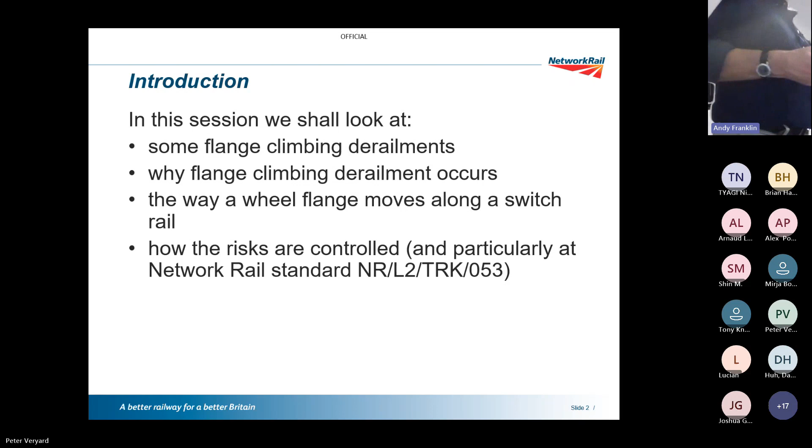Things to keep in mind: when we're doing the checks with the gauge, that's quite a lightweight gauge, but what we're really dealing with is a wheel set, which weighs around a ton. So there's a fair bit of inertia there. Wheel sets really run around on their own, but they're normally in a bogie these days, so you're now going up to what, 5 tons or maybe 7 tons for a passenger coach. And obviously for traction motors as well, you've got more of that. So there are considerable inertial and non-track forces in action, for example bogie rotational stiffness and yaw stiffness and those sort of things. So when you're using the gauge and doing checks on switches, think of that's what you're really dealing with - big, heavy chunks of metal with a lot of inertia and a lot of force.

Okay, so the TGP8 gauge we use is basically a thin slice of a wheel - it's the wheel profile of a new P8 wheel profile. And I think by its nature, it's not a simple no-go gauge, so you do need to understand what it's telling you and think about it.

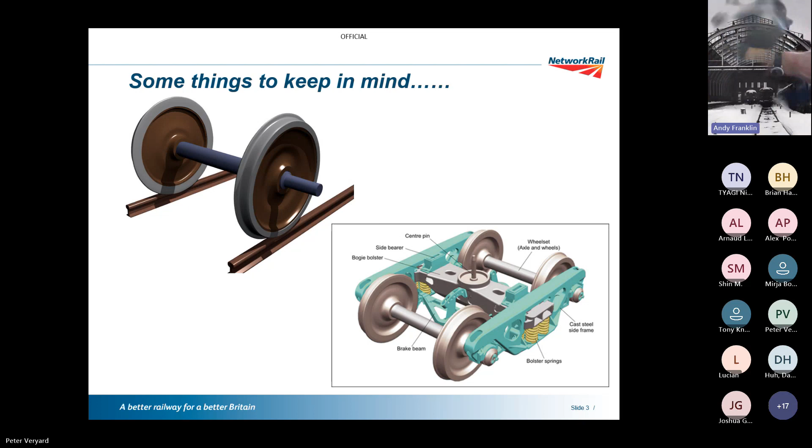This was born out of when we had a couple of incidents in a row. We had 2 incidents at Waterloo, and some of you may remember it, some of you may not - 2006. We had two derailments in pretty short order, 11th of September, and then another one on the 24th of October on the southern region at Waterloo Station.

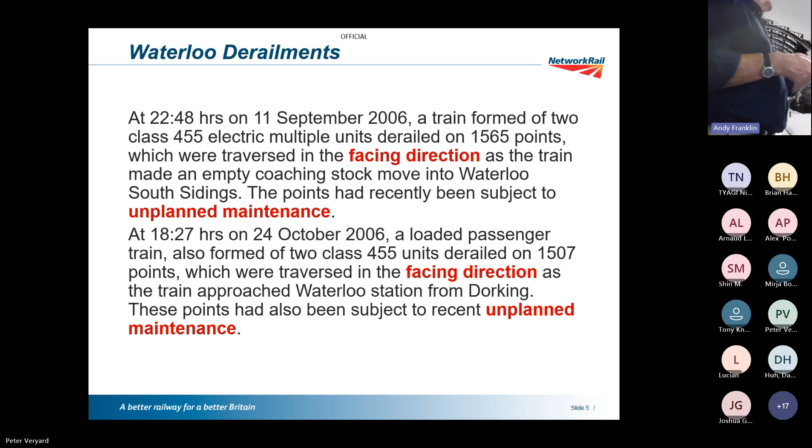And the key things that came out of the RAIB inquiry is they're both facing point directions, and I'll explain in a little while why facing points are different to using the points in a trailing direction, and indeed why flange climbing derailment on S&C is a significant risk where it's a much lower risk on plain line.

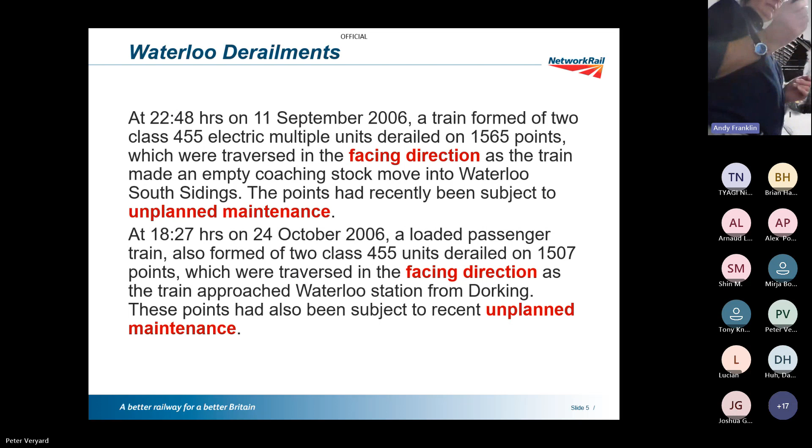The other things they talked about were what they described as unplanned maintenance - this was people reacting on the night to what they found. The work hadn't been properly scoped up. It was a case of, well, we find this and we'll fix it, or we'll try and fix it. And in both cases at Waterloo, they failed to fix the problem properly - they fixed the immediate fault but left the switches in an unsafe condition. So in both cases, it was the next train over it that came off.

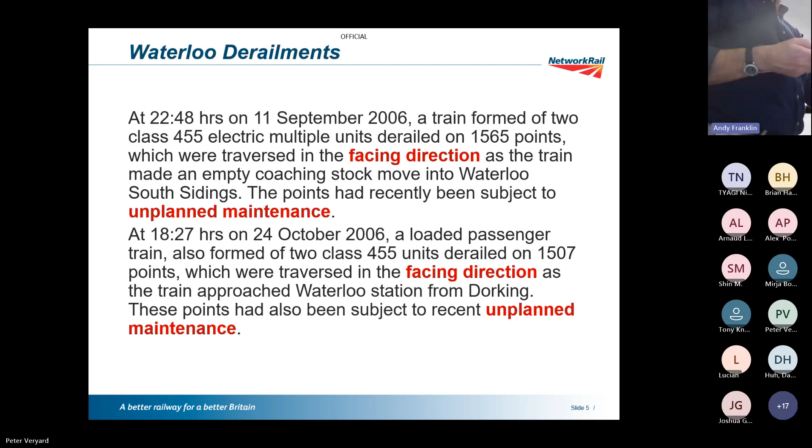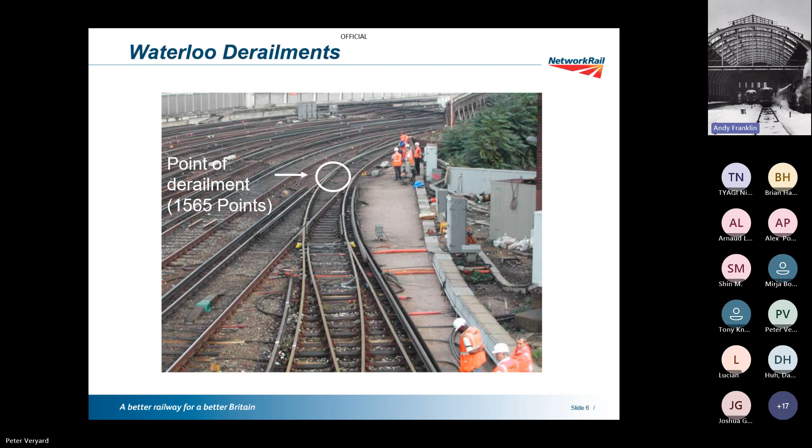And these are the 2 sites - fairly typical high-risk sites. This is coming in, the train was coming round into the siding, so obviously you've got quite a sharp curve in there because it's a similar flexure where it's almost straight the turnout, but you're going to get hard flange contact on the approach to it. This is the other one - the derailment happened back here, on the train that was passing round into there, that's the back end of the train. And as you can see, there's quite considerable wear on this switch.

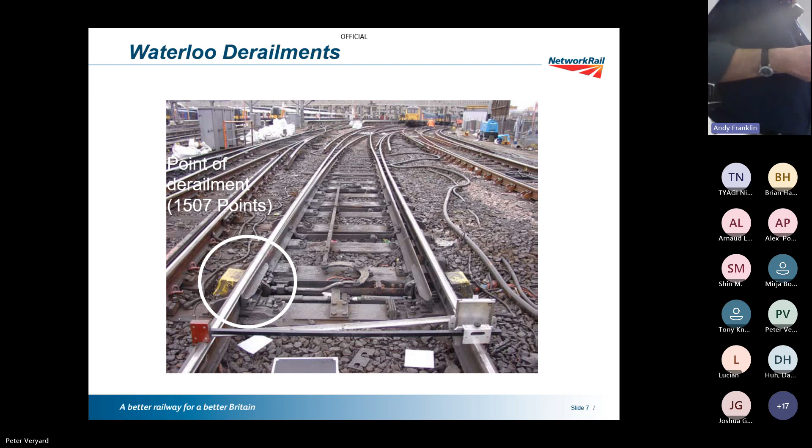So by their definition, you need high forces, and high forces usually mean sharp curvature. So facing switch derailments from this cause on a high speed track are extremely unlikely because the forces just aren't there. Having said that, they are generally low speed derailments, but I think you'll agree, I mean this is Waterloo, that the consequences could be quite significant. And if you think about the risk of a train coming into contact with line side furniture or with another train, that would be another big risk. Also doing that in front of Waterloo Station is a bit public as well, so it does our reputation absolutely no good at all.

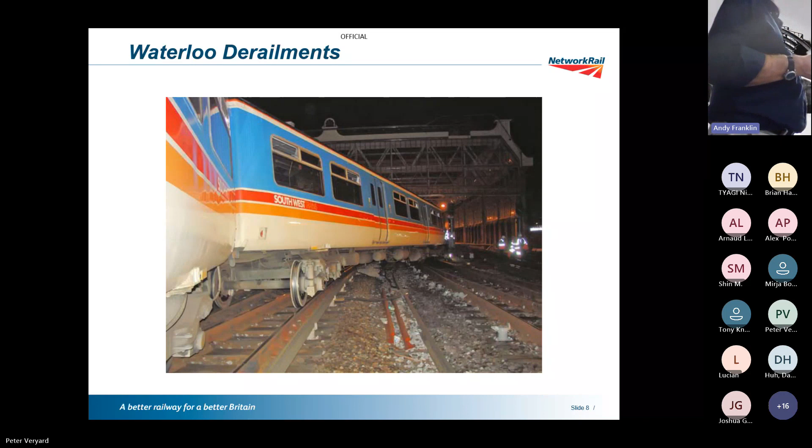So that's really the background of why we started changing the standard and how I got involved in looking in a bit more detail at why we get flange climb derailments. Okay.

So we're focusing here on flange climb derailment. Clearly, there are other reasons in S&C switches, so things like broken switches, point machines moving under trains, that we're not really looking at. We're looking at the risk of flange climbing derailment.

So in 1908, a guy called Nadal, I don't think he was a tennis player, but he may have been, came up with this simple equation for the critical value of Y over Q based on this simple analogy of a block sliding up a plane.

So Y is the lateral force, that's the force from the wheel flange outwards. Q is the wheel load, which is predominantly the weight of the train, but it's affected by loading and suspension as well. Beta is the flange contact angle, the angle from a horizontal plane to the face of the switch. And mu is the coefficient of friction between the contact point on that slope and the wheel, which is affected by the normal force.

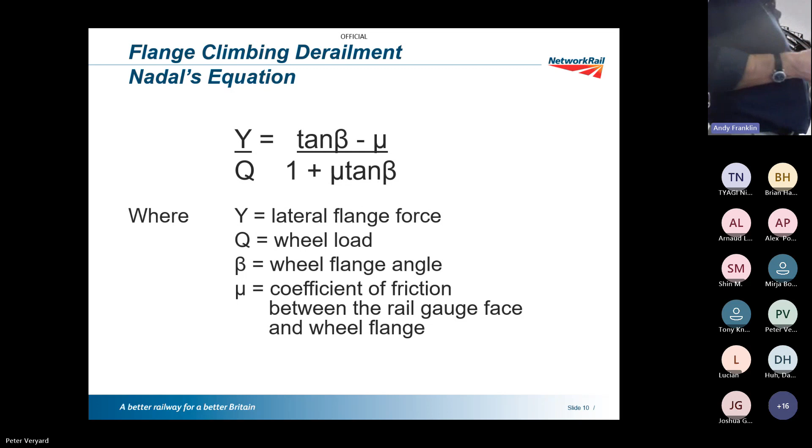Okay, so that's the relationship that applies. And what's really important is that at the point where flange climbing derailment is likely to occur, what we call Y over Q critical, equals about 1. So the objective is to keep Y over Q less than 1, because when you get close to 1, your factor of safety is disappearing and you have a real risk of flange climbing derailment.

So what we do, typically we accept it as 1. Clearly, in reality, we want a factor of safety. In essence, we usually work to a smaller value, 0.8.

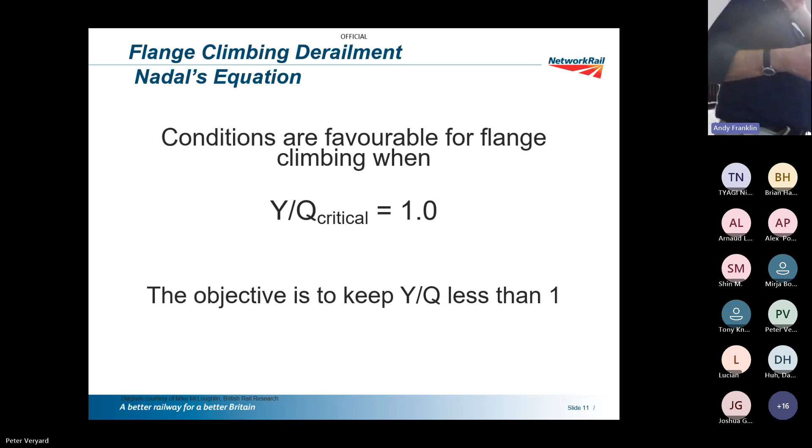So I think that's fairly straightforward. So what's going to happen when we start changing these things? So this is the wheel contact area. We've got Q bearing down, the weight of the train. We've got Y, which is the lateral force. This is the switch, so we'll have a normal force in there.

And this angle is beta, which is the plane of the two stock rails. So you can see by when we look at this, if we increase beta, we reduce the risk of derailment. The steeper the slope, the less chance of the wheel climbing it. And I think that's fairly intuitive, isn't it?

Also, if we reduce mu, i.e. we make the slope more slippery, then again, it's going to help avoid a train climbing. We'll look at the mechanism actually in a minute.

So again, from a maintenance engineer's point of view, those are the things we can manage, aren't they? We can manage the lubrication on the switches, and we can manage the flange contact angle by inspecting it and applying rectification. Clearly, we can't have a particularly big influence on Y over Q.

That's more the train side, but we'll see how changing that can also cause problems for track. So the opposite side of that, if we go on, is anything which increases the risk of derailment, so by reducing Q, anything which causes wheel unloading will increase the risk of flange climb, because we change the product.

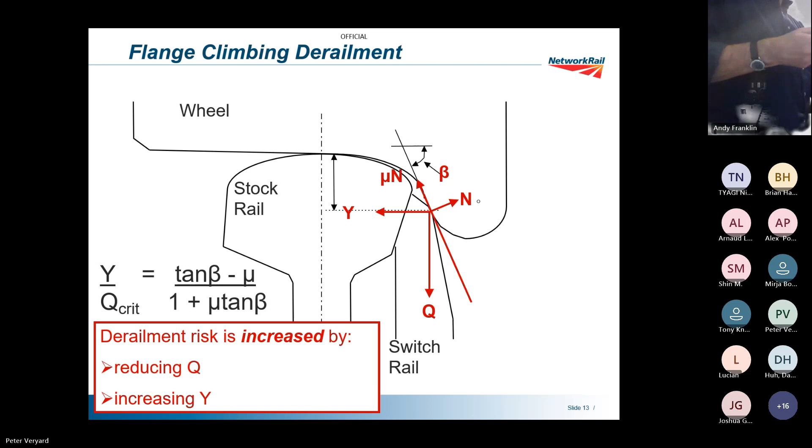So where do these figures come from? Well, they came from some UIC research. The UIC published a code 716R called Maximum Permissible Wear Profiles for Switches, and that's what British Rail Research used when the first edition of 053R switch wear management standard came out. And that was based on a lot of observations and some experiments.

And they basically said that to have a reasonable ratio of lateral to vertical force, it should be in the order of 0.8 for S&C. That gives you a reasonable factor of safety. And if you put that back into the equation and work it through, that's equivalent to a flange contact angle of 60 degrees for a coefficient of friction of 0.4, and a flange contact of 55 degrees for a coefficient of 0.3. And those of you familiar with 053 will be familiar with this 60.

It's the intervention point, that's the angle we start to plan to do some work. We must do it before it gets to 55, or that's getting into block-the-line territory. And when we grind it back, for a while we just ground it back to 60, but clearly if you grind it back to 60, the next time you come along, you're going to fail it again. So we try to grind to a slightly steeper angle of 65 degrees, which is actually still flatter than the original machining of the switches. Okay, does that all make sense?

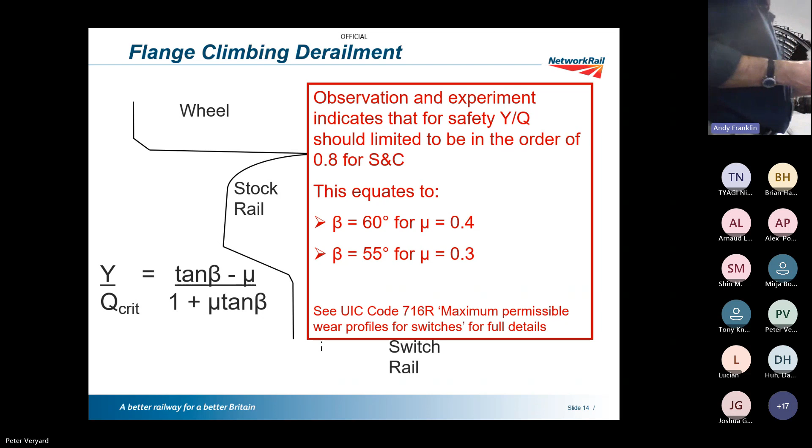So think about some other things which affect it. In an ideal situation, with a single wheel set running down a piece of perfectly geometric track, the rolling radius difference, because the wheels have a taper on, will mean that the wheels will steer themselves down the middle and there will be no flange contact.

In practice, that doesn't happen because we don't have perfect track. And also in curves, you want the wheel to shift, don't you? So the wheel steers itself by shifting outwards so that the outer wheel is now running on a very slightly bigger radius than the inner wheel. It's quite subtle, we're only talking millimetres here. But that tendency of the wheel to shift to correct the rolling radius difference means you tend to get a bit of gentle movement in the flange.

So clearly in a pure situation where the wheels are rolling as a single wheel set, that's the situation. If you now constrain the wheels, so the wheel sets want to sit radially to the curve, but we've now constrained them in a bogie frame or a vehicle frame, they can no longer do that. They are constrained to stay. There's a bit of flexibility there, but not a lot.

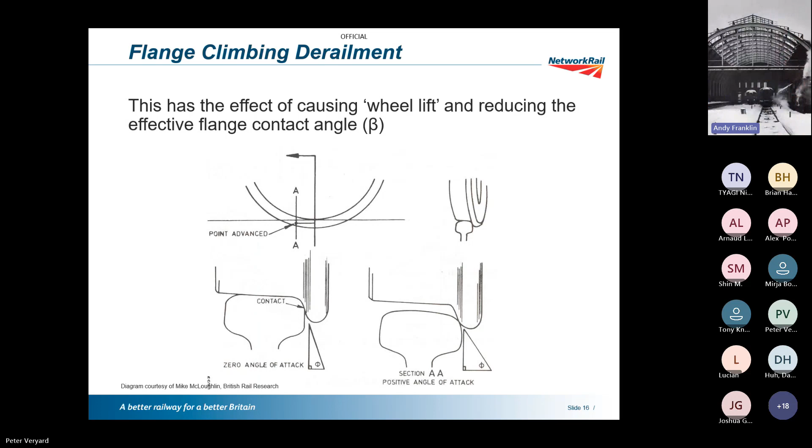We don't really compensate for that in what we do with switches. We have safety margins built into it. But if you were modelling a real switch and a real situation, a real wheel, then you can actually start taking account of things like this using VAMPIRE modelling and things like that. So that's quite important because that does affect the risk of flange climb. Does that make sense?

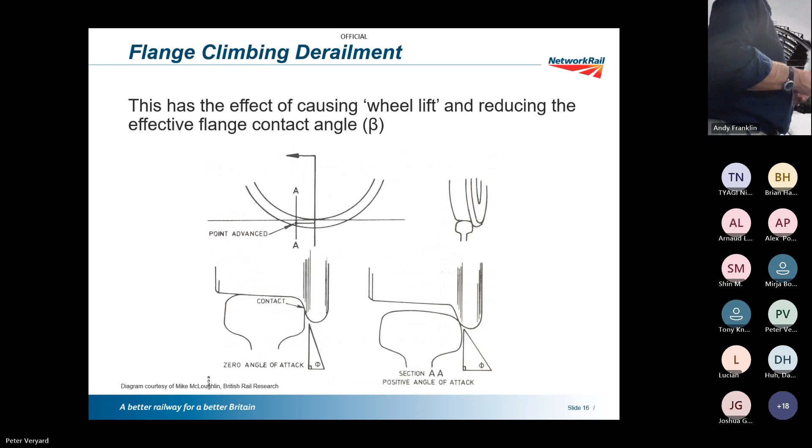So this is a case of a flange climbing derailment which didn't quite happen. Obviously the switch must have been shut at the time, but you can see here where the wheel has climbed onto the head of the rail and it's run along effectively with the switch closed. It's run along the edge of the switch and then dropped back in again. If you ever see anything like that, block the line. But it does happen, and we do get things like that. You do occasionally see the marks on the face of the switch - scuff marks here, where the wheel has climbed up and then dropped back in again.

Because as you think about it, as the wheel starts to climb up onto the flange, the rolling radius difference is now huge, isn't it? So it's going to tend to steer itself back into the track again. But it is worth remembering, this was an incident at Victoria Station some years ago, and it was spotted by one of the S&T techs who was working on the track in the days when we used to work on the track with trains.

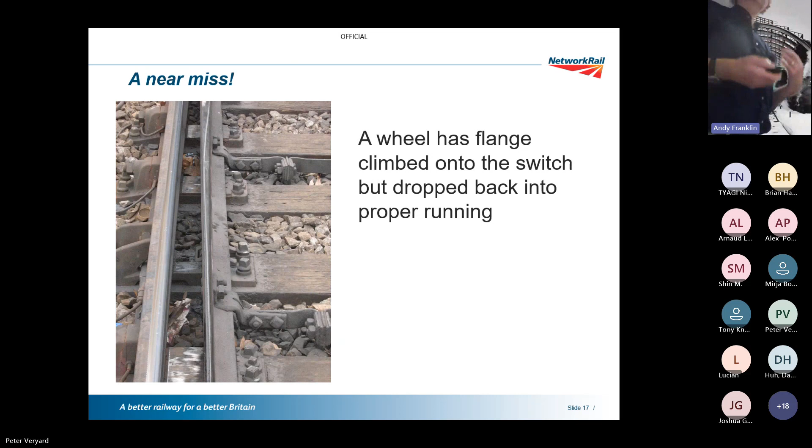So that's the theory part of it. Now we'll move on to the forces in action, and explain that. So what are the forces in action?

So this is a typical modern turnout, seen during relaying, and it's Chipping Sodbury. If anyone's into it, it's probably been underwater recently as well. So it's a modern design turnout.

In normal running, the wheel sets tend to steer themselves to be central using the rolling radius difference. So if you're running straight through, as this is set at the moment, you're probably not going to get any flange contact at all. You might get a slight flange contact, but very little.

But if you've now reversed the point going into here, at some point this wheel set running along here is going to come into contact with the switch and be steered onto a new course. In maintenance terms, I can think of lots of places where this switch doesn't last that long, but this switch is the one that was put in when they laid the turnout, because this switch is going to get all the wear, isn't it? Yeah, and that's within a simple straight turnout.

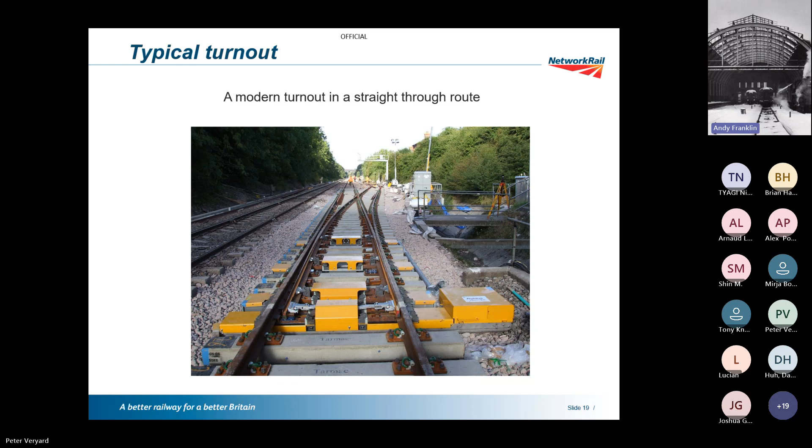Clearly, if you curve up the main line radius, then you start to change things again. But the way we do it in the UK is we keep the lead length the same, we keep the crossing angle the same, we keep the offsets the same. So something's got to change, and what changes is the radius. So these two turnouts are identical.

This one's a similar flexure, and you can see the effect of the curvature here is to tighten up the radius inside the turnout. So similar flexure switches are always much more at risk of facing switch issues, wear and derailment risk.

With contraflexure, the opposite is true. In this case, if you imagine it was straight, it would be curving around there much more. It's had the opposite effect, hasn't it? The mainline curvature has actually flattened the turnout radius.

So generally, contraflex switches don't have this problem to the same extent. They do have problems like this one because of the cant on the main line and those kinds of things, but we'll put them to one side. They're not the risk that similar flexure switches are. So we spend a lot of effort these days trying to design track layouts without putting more similar flexure turnouts in them.

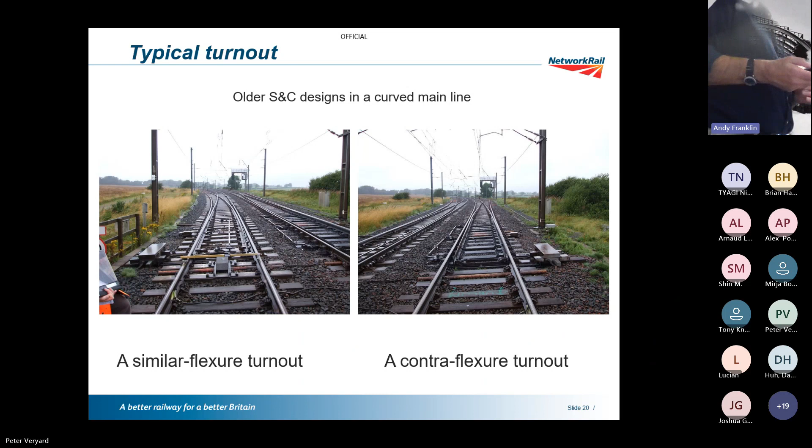Okay, so let's have a look at the forces. Does anybody recognise that diagram? Mr. Steele will, anybody else? That's the base geometry of a vertical turnout.

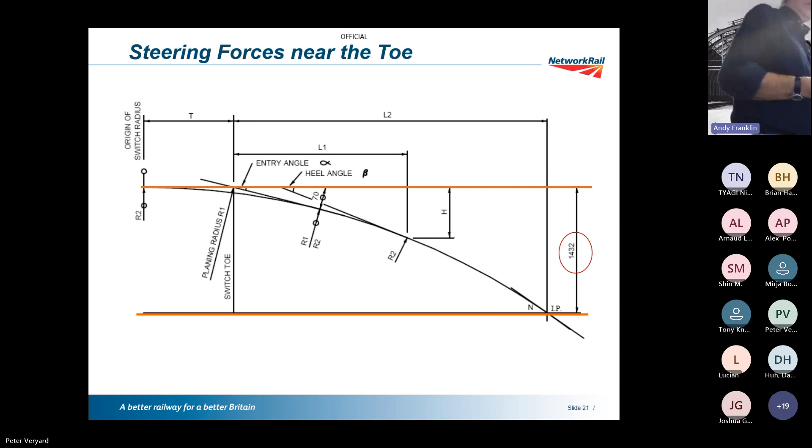So it's a natural angle turnout. Obviously that's your gauge, 1432 in this case. And the design, the turnout curve actually, in theory, makes a true tangent with the high rail, the stock rail.

Now it would be lovely to make a switch like that, but what do you think would be the practical limitations if we did that? A razor sharp switch - you'd have a razor sharp switch, and it would be very thin and very delicate.

So it'd be nice to do that, but what we practically do is from the point where the head - this is 70, so that's the rail head width - the point we go there, we add a planing radius, which is a flatter radius. But what it means is that where the switch at the wheel switch toe meets the stock rail, you now have a finite angle. You've an alignment fault effectively, don't you? Yeah, the entry angle to the switch.

And the shorter the switches - so A switches are our shortest switches - has the biggest entry angle. H switches, G switches have a much, much smaller entry angle. And that's another driver of why we get more problems with short switches than we do with long ones.

And obviously, if you're talking about CV 9 1/4 and DV 10 3/4, it's quite low speed as well, but quite tight curvature. So what happens to our wheel set as it's turning along?

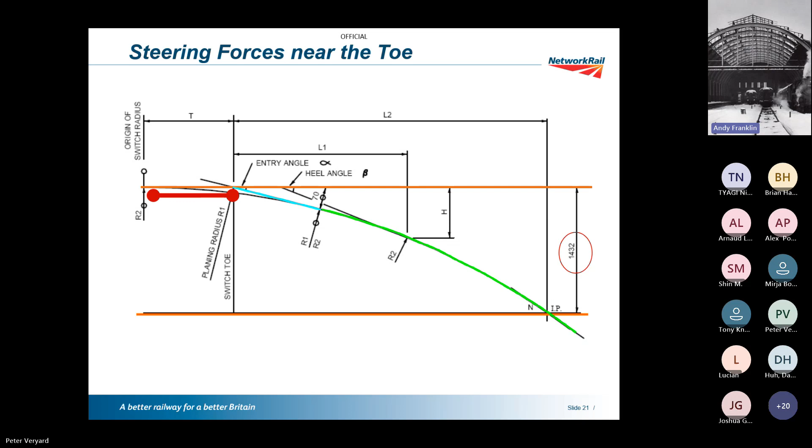But if the main line's curved, and particularly if it's sharply curved - think of the pictures of Waterloo - it's quite likely that you will be running in flange contact already before you get to the switch.

So again, we come into the turnout. Let's run through that - what happens here? So there's our first case. In this case, there'll already be some lateral force because we're in flange contact as we're approaching the switch. We then have a much bigger peak because it's steering further round. And because this is tightened up, we settle down to a higher curving force in the turnout.

It is this which drives facing switch derailment, because typically it happens in the first metre and a half of the switch - you've got this big lateral spike, and as we saw, anything which increases the lateral force increases the risk of derailment, other things being equal. Okay, does that make sense?

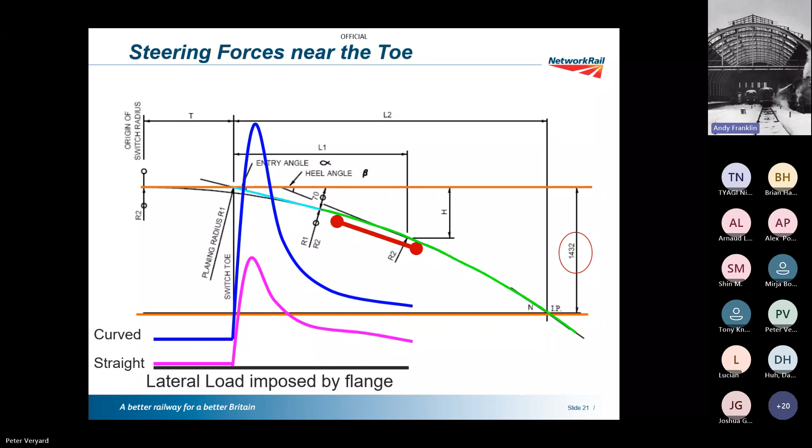Any questions online? No?

Why don't we, on similar flex switches, just put 5 or 10 millimetre cant on the switch? You could, and it has been done in the past. Horrible to maintain - it's a real challenge to maintain, but I think the answer is really to try and avoid using them.

We tend to use short switches for the wrong reasons, don't we? There are places where it's geographically constrained - at the end of Shrewsbury Station, you haven't got much room before the two routes diverge, so you're going to end up forcing a lot of S&C in there. You will end up with A switches in running lines in places like that. Where we don't have to, we should put in really the longest leads which are economically sensible, shouldn't we?

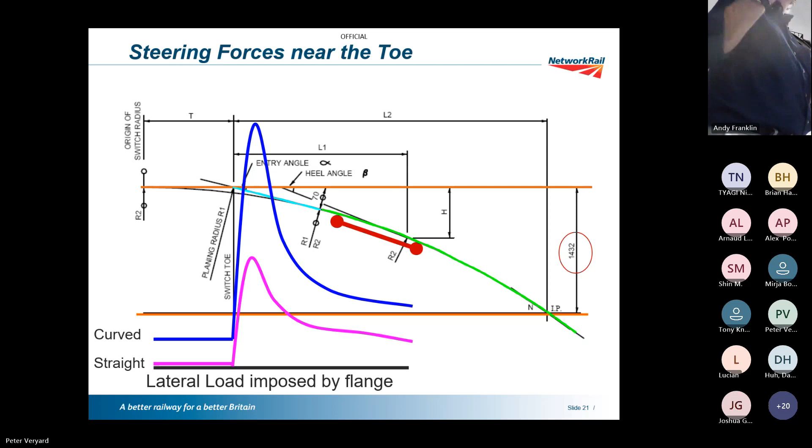So what other factors influence this thing? This is the Waterloo derailment switch.

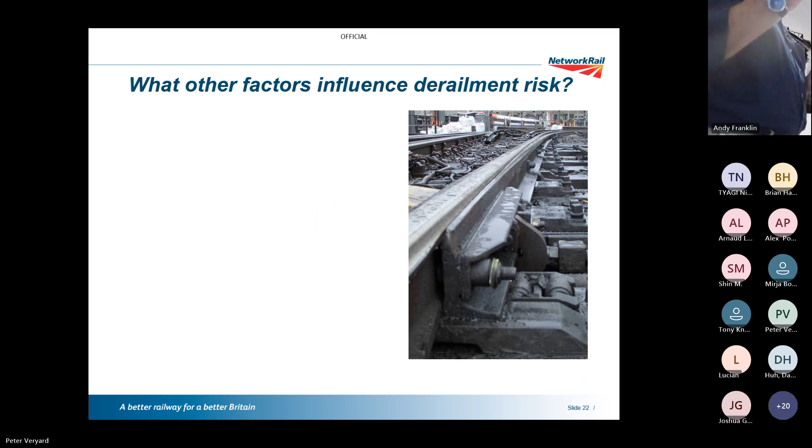Other factors that affect this, first of all, is track geometry in terms of design. Have we used a short turnout where we could have used something longer? Can we make improvements to straighten out the main line so it doesn't become a single flexure turnout, sitting in straight track with no cant on it? As a RAM, I used to be involved in that discussion at the Form A stage with our renewals contractors about them demonstrating to me that they had optimised the design.

I wasn't always totally convinced of what they told me either, but we had the discussion, and that's really important.

The next thing is track geometry - faults that have arisen in the track due to traffic and wear and those sorts of things. They're influenced by maintenance standards, and there's two ways to that: one, what does the maintenance standard tell you you must do? But also, what is the attitude of the maintainer in terms of how quickly am I going to intervene, how am I going to avoid some of these problems? We'll look more at this switch in a minute and see where there's some issues there.

Lubrication's a big one. We've seen how important it is. Rail lubrication's a good thing because it maintains the shape of the rail anyway, so it prevents the switches wearing out so quickly, and it prevents them changing shape so quickly with wear.

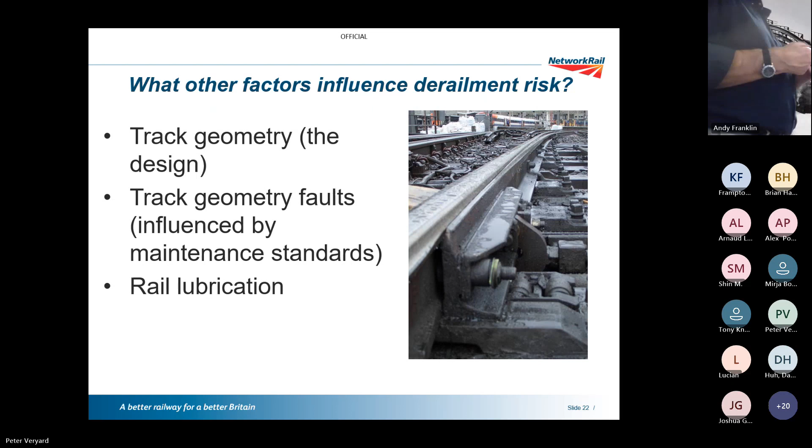It also has the added benefit that it increases the factor of safety in a derailment situation. Do friction modifiers have more advantage than lubrication? You tend to need both. Friction modifiers are certainly a big help in S&C, though we're only really using them in a few places now.

But yes, because it enables the bogie to steer better, you actually reduce the angle of attack, so they're certainly worth looking at. We've got several places which have them installed specifically for that purpose. Even though we might have originally put it in because of noise, we've noticed it has had beneficial effects on wear - top of rail friction modifiers are worth thinking about.

If I had a criticism of the other installations I've seen, they've gone too far with it - you don't need to coat the entire thing with horrible grey paint. It's the bit where the big steering's going on that helps.

And of course the other thing which affects it is rolling stock defects. Whilst we don't manage that side of it, we rely on the train operators and train owners to manage that side of the equation. There are just as many railway group standards for thickness of flanges, wheel turning, roundness and all those sorts of things. But it is possible to get a derailment set up where the track isn't at an actionable limit and neither is the rolling stock - that combination can be an issue. It's very, very rarely one side or the other.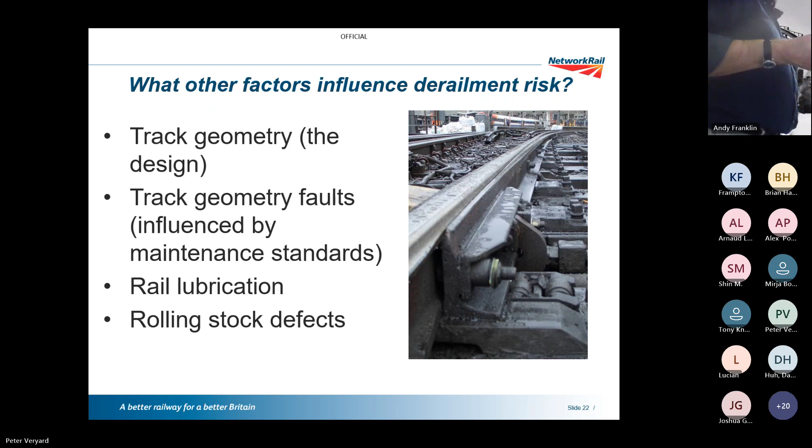So we talked about wheel unloading as being important. What sort of things cause wheel unloading? Dip joints - the twist resulting from dip joints. And as Andy said, we very conveniently placed the site-made IRJ at the front of the switches, about 3 meters from the toe of the switches.

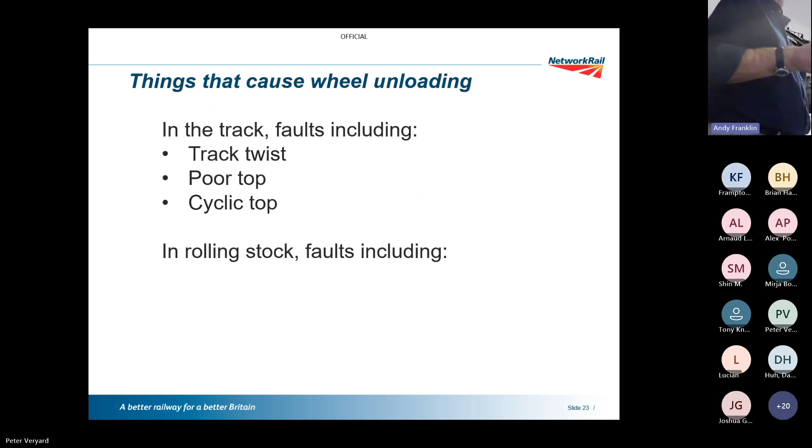So that's the track side. What causes these sorts of problems on the rolling stock side - what causes wheel unloading on trains? Bad loading is definitely one, that's particularly freight. Suspension faults - things like broken springs, because obviously if the spring is broken, it's not sharing the load evenly, is it?

Vehicles are fitted with shims because vehicle frames and things get twisted over time or during manufacturing. I can think of one derailment where they'd got the shims the wrong way around, so fitting them made it twice as bad instead of curing it. So things like frame twist could be a factor.

Not so much of a problem these days because we don't have many two-axle wagons anymore - frame twist used to be a common problem with those. And as somebody said, poor loading, particularly with freight trains, is an issue too. We had an SO53 derailment at Shrewsbury, and a lot of that was down to a train that wasn't particularly well loaded - all the coal had been loaded over one side, which certainly didn't help.

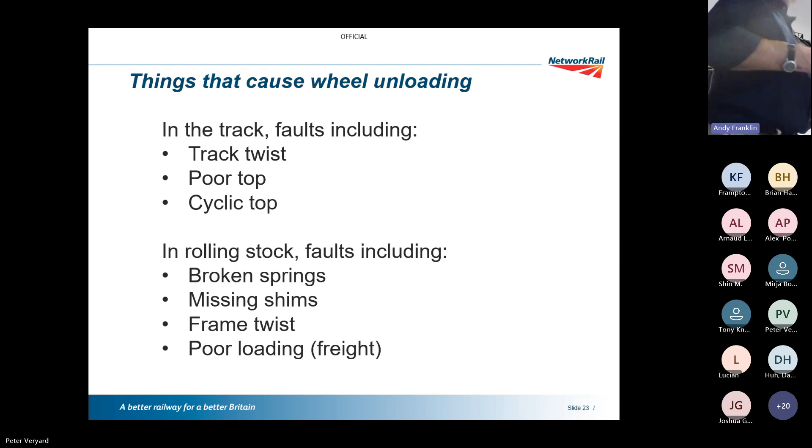Okay, so another very common cause of poor track geometry is poorly fitting track components. This is the derailment site at Waterloo - this is the derailment switch. So the first question I would ask is what the hell's a fabricated crossing doing at Waterloo? I know why it's there - it's because they broke the crossing that was there, scratched around in the bushes, and found something that would fit. It's much too straight for the situation it's sitting in.

That is absolutely fine - we've got to get the trains running quickly. But I would advocate keeping a bodge register for things like this, to remind you that this is actually a pretty temporary job and we must go back and change it. And you can see the results of that - again we have a big misalignment here. You can see the rapid build-up of sidewear here in the run-up to the toes of the switch - you can see it, it just starts here and goes up into the switch. And there's a few other things wrong as well - some dippy joints, this one back here for example.

So again, wheel unloading and those sort of things. So when you're doing your SO53 inspections, you do need to be cognizant of the general condition of the track as well, and try to avoid these things which, you know, we set up ourselves.

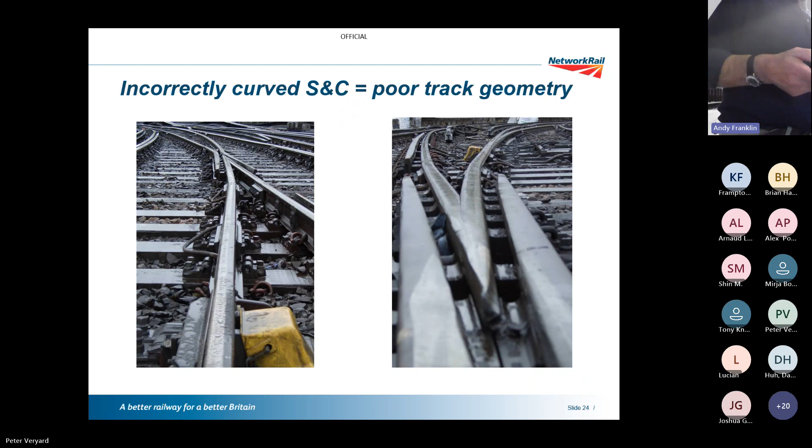Okay, so we now talk about lateral loading - what causes high lateral forces in track? Curvature is the absolute key thing - the tighter the curve, because eventually the steering mechanism breaks down as the wheel can't shift enough to correct it. So the flange comes into hard contact, and we've all heard that horrible screaming noise you get - it's because the two wheels are fixed on the axle and they now can't both turn at the right speed, so one of them is slipping, and that's what that screaming noise is.

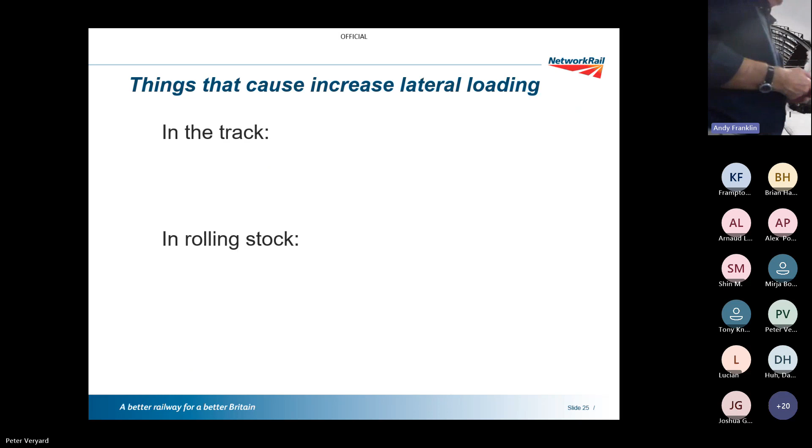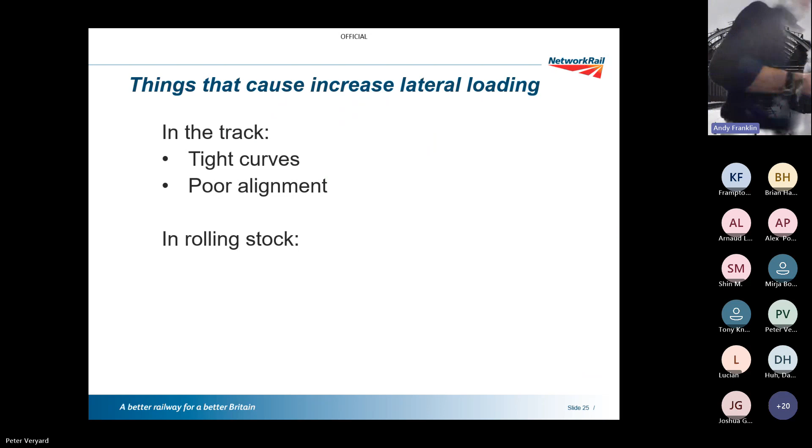So anything which tightens the curvature up is bad news, and I think we saw the other example there too - poor alignment. In that case we had a very poor joint, and you could see it was causing wear problems. So for rolling stock, similar things apply - stiff bogies, so the bogie rotational stiffness is really important. If that's really stiff, you're going to get higher track forces. Again, in some of the recent derailments, we found the vehicles involved weren't bad - Sheffield was a good example. It wasn't bad, but one vehicle had much more wear on the wheels on one side than the other because the bogie was quite stiff.

So again, it wasn't really at the actionable limit, but it was getting there. We're reliant on the rolling stock people playing their part in this as well. The other thing is long rigid wheelbase. We don't have that to the same extent we used to, but Co-Co locomotives, even some Bo-Bo locomotives have quite a long bogie and they're quite stiff. Some of them, fortunately, are very good, but things like class 47s and class 37s, which are still running around, are really bad. Class 66s, fortunately, aren't, because they have bogie steering in, which helps as well.

What about the FLIRTs that are running down in South Wales? They're too damn heavy. Well, the power cars have got a 7.6 metre wheelbase now. Yeah, but it's rested, it sits over two bogies, suspended between two bogies. So it's still 7.6 metres. Yeah, that's really short, isn't it?

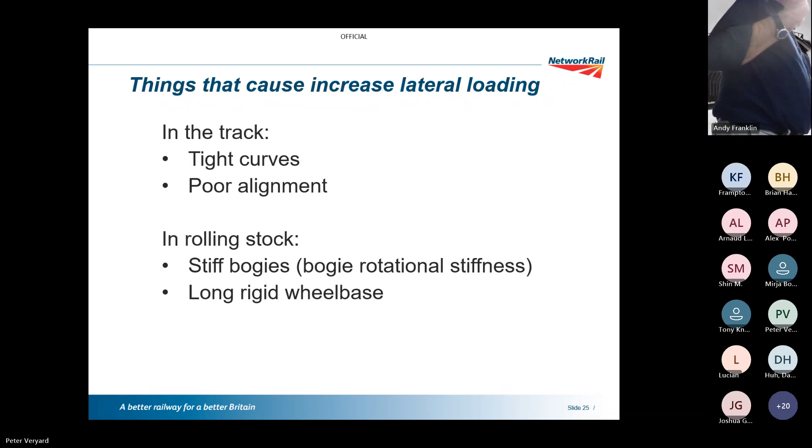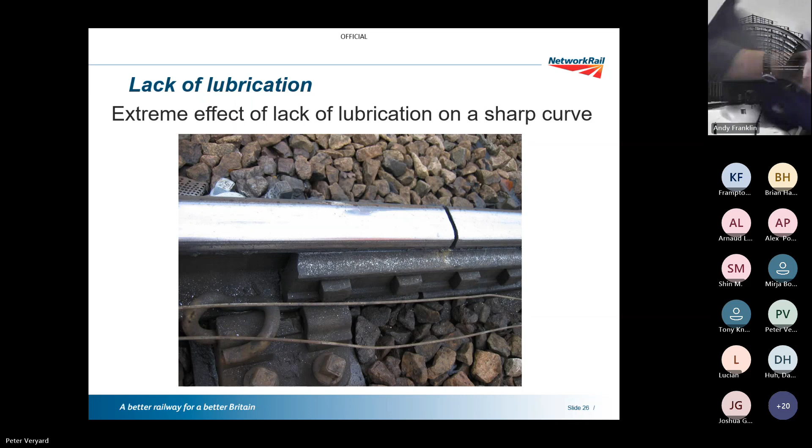High risk locations, similar flexure turnouts, places with no lubrication, and short switches are the places we need to be aware of from the maintainer's point of view, where we're likely to have problems.

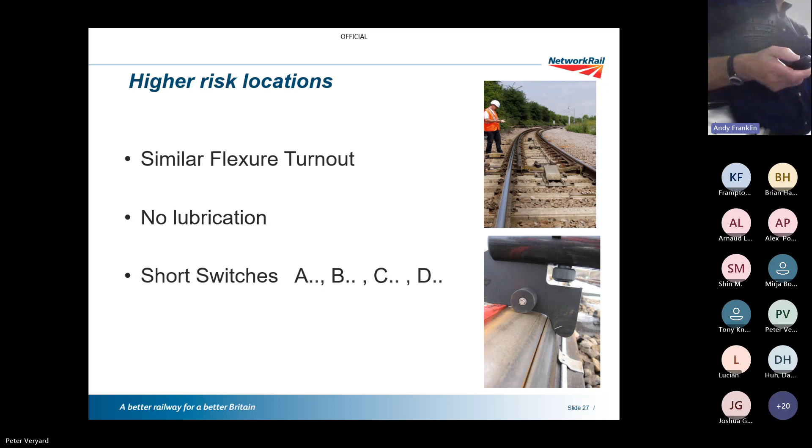So this is a flange's eye view of a switch. We talked about the contact points and things like that. The wheel's going to make contact somewhere in that first metre, metre and a half of the switch. This is an NR60 switch, and that's actually machined sufficiently - the machining deliberately tucks the tip away under the stock rail, so you shouldn't get contact right at the front. If you have, you've got a lot of stock rail wear. Also notice that there is a topping on the switch - the switch ramps down, and that's part of the design, because what we're trying to do, if you imagine the wheel running up here, is we've got to transfer the wheel from the stock rail onto the switch rail.

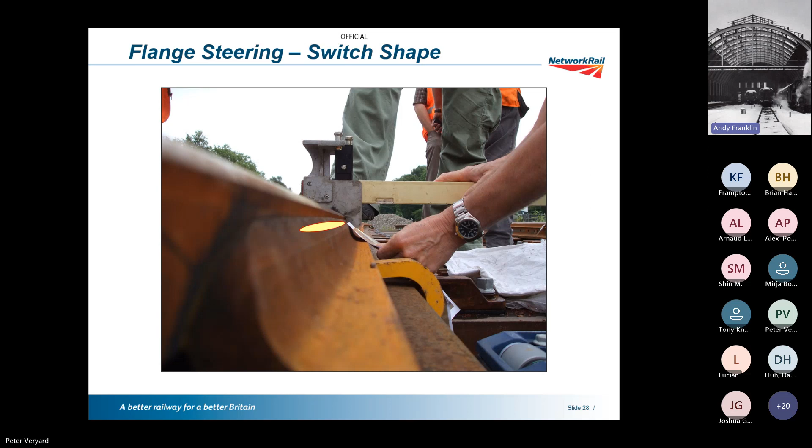But this is where our discontinuity in the alignment is, and we've seen that's where our peak forces are. So these are the places to be where you're likely to find the problems. It typically happens close to the toe, where the angle of attack and lateral forces are the greatest, where the switch isn't full height, because as the switch gets lower - and that's why we have limits on height of switches - we can actually see that.

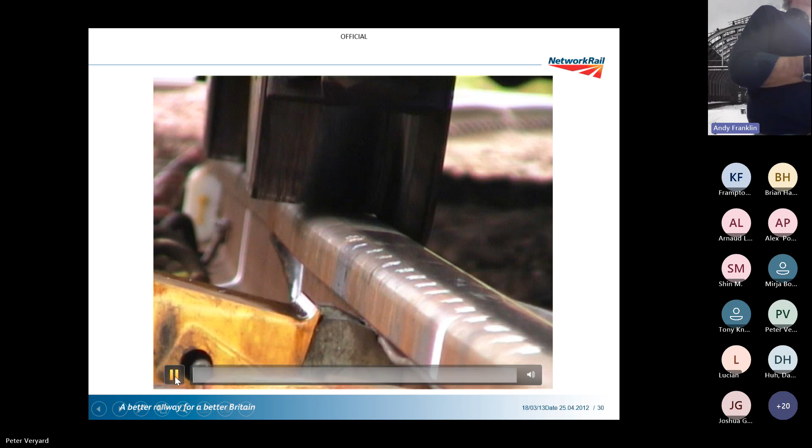So let's have a look at a derailment. So this is the flange climbing derailment happening. Okay, let's go back again. Go back again.

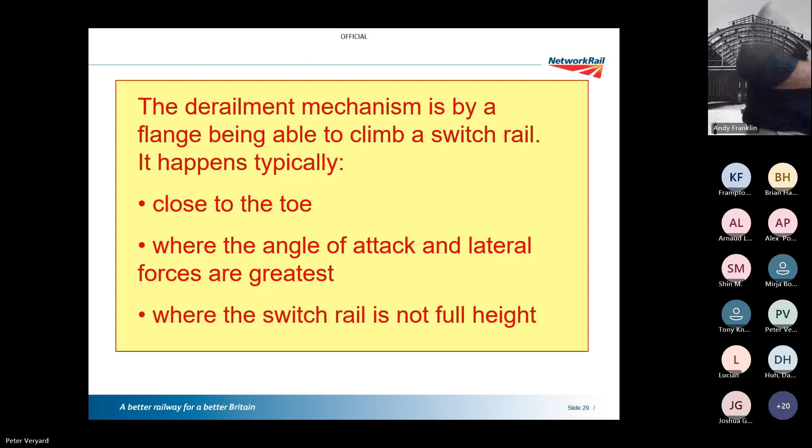So this was a Class 37 locomotive, on a derailment site in Scotland. Basically, they'd done it, it was all marked up, they worked out what happened. Someone said, well, if you try it again, and it did. If you listen to the sound on it, there's lots of people going, whoa, whoa. But you can see what happens - the flange, in this case the leading flange on the leading axle, so it's a 3-axle bogie, makes contact with the switch. It climbs up, runs on the top of the switch, and then drops between the switch and the stock rail. And obviously, as you carry on up the turnout, it's now running on 2 stock rails, and this will run into derailment.

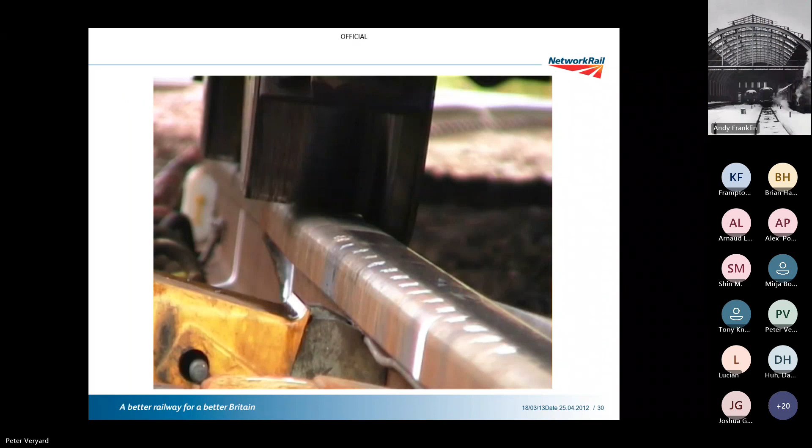So it is as quick as that, yeah. All right.

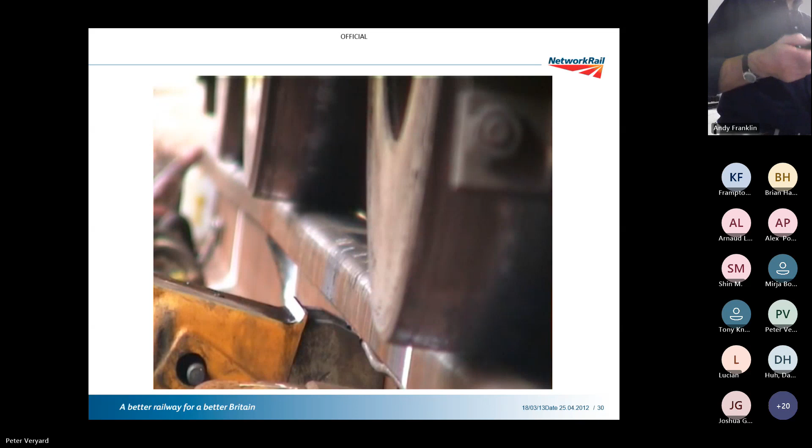So that's the sort of theory part of it. Let's go and have a look at some real cases now.

In 053, we talk about 5 hazards, which are things we need to be looking out for when doing inspection, because they represent a risk. So remember what the 5 hazards are.

No is a perfectly reasonable answer.

So hazard 1 is side-worn stock rail with a little used switch.

Hazard 2 is switch and stock both side-worn, and that's probably the most common one that we encounter with derailment risk, particularly where we're doing remedial work on switches, because actually running this out smoothly is a bit of a challenge. Hazard 3 is a head-worn stock rail.

We don't see that very often anymore. Tends not to be such a problem, but a typical place to find it will be in trap points. Because obviously nothing ever runs on the switch, does it? Well, hopefully fine. So you're going to get this wear, so you do need to lower it down eventually.

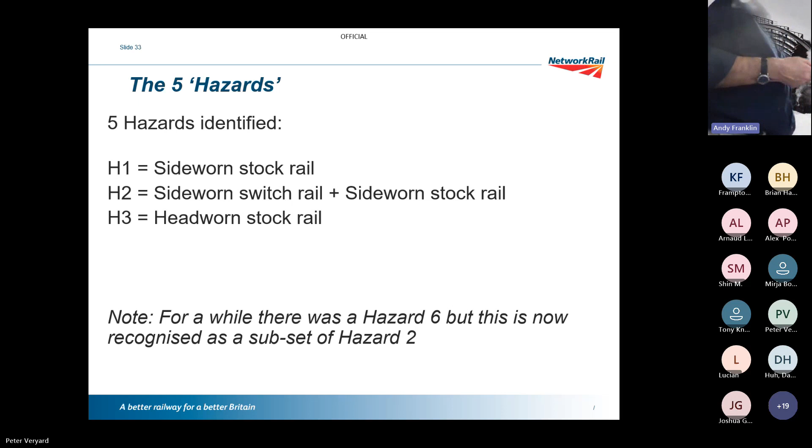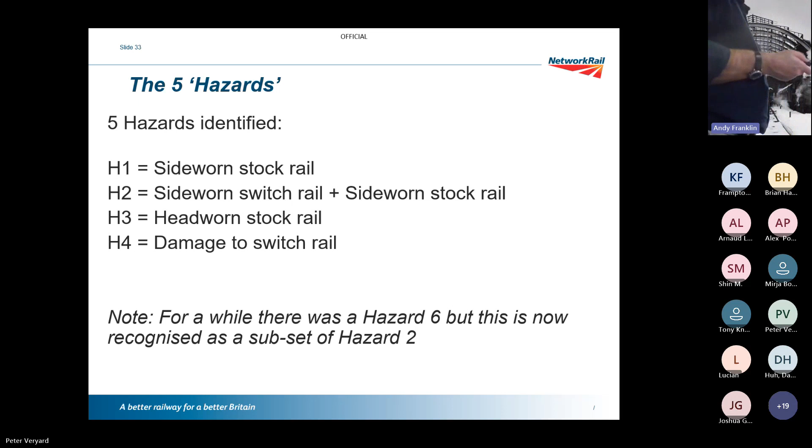Switch rail damage is directly linked to lipping. And from a maintenance point of view, if we can remove lipping in a timely way, we won't get anywhere near as much switch rail damage, and we'll talk about that in a bit more detail in a minute.

And then the final one is a sharp radius to the flange contact zone. So the switch has got a faceted surface or sharp angles on it, and that will engage particularly with newly turned wheels and can lead to some problems.

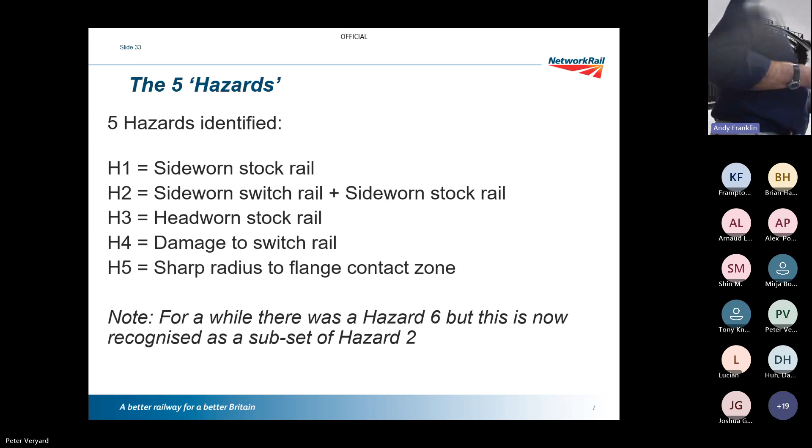Right, has everyone heard of the 5 hazards? Yeah. So we'll come back to that. Let's have a look at some examples now. So these are all derailment sites, incidentally, as well.

So hazard 1 is the sideworn stock rail with a little used switch. Does anyone remember what the limit on sideware on switches is? 9 mil. No.

Stick on the gauge, that will be 9. No, it won't be, 6 mil or 6 on the gauge. This is already at 5.

And you can see here the sideware scar is way below the switch, isn't it? So if you imagine there's a gap behind there, and you can see where the wheel's been bending the switch toe tip into the flange way, and you can see indeed where the wheel finally hit it and derailed. So, okay, that's a hazard 1 type failure.

Again, you need to make sure in your inspections that you do regularly close the switch against the stock rail, because if this was always looked at open, it's quite difficult to judge whether you've got a problem or not. And that's the usual reason that people don't pick up on it, is we don't inspect them frequently enough.

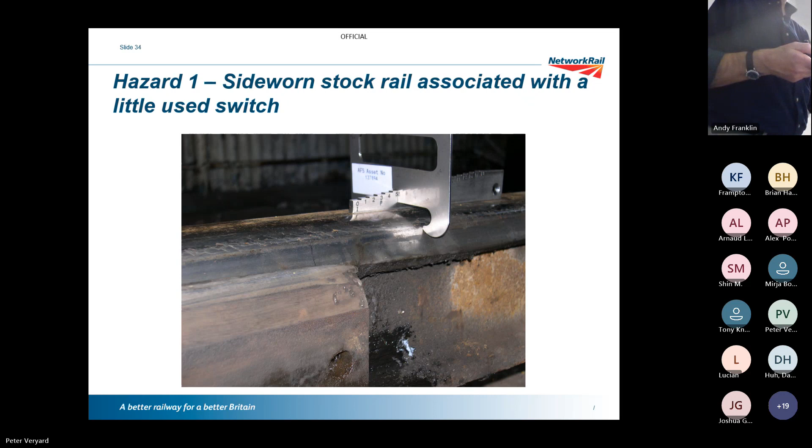Moving on to hazard 2, and this is probably the worst one because of what actually happens. So this is the drawing from, this is an extract from 602, the planing of switches, and it's a cross section to a full depth vertical switch, but full depth and shallow depth are the same anyway from this part of the rail point of view. It's about 1 metre from the switch toe, so we're right in the wear area. So obviously all the wheels hitting and being steered are going to start to hollow out the switch because they're going to hit in the same sort of range. And the switch itself here by design is nearly 12 mils thick, so it's fairly chunky still.

So what I've drawn on there is to show, I've done an idealised sideware scar. I've just used the P8 profile, and you can see the effect of that is as the switch starts to wear, not only does it get thinner in here, it also gets shallower. And as we've seen, as you get shallower, you start moving around this curve again. So you start running a risk of, again, it increases your derailment risk situation.

In practice, that shape wouldn't be a pure P8, would it? It would be an amalgam of all the wheels that run over it on a regular basis. So we'd have some trains that were in the workshops last night, they'd have a new P8 profile, others would be at the limit of the wear the other way. Not all vehicles are fitted with P8s, we use P6s and other things, still a few P1s around and things like that. So it is really important, again, to think about what's happening there.

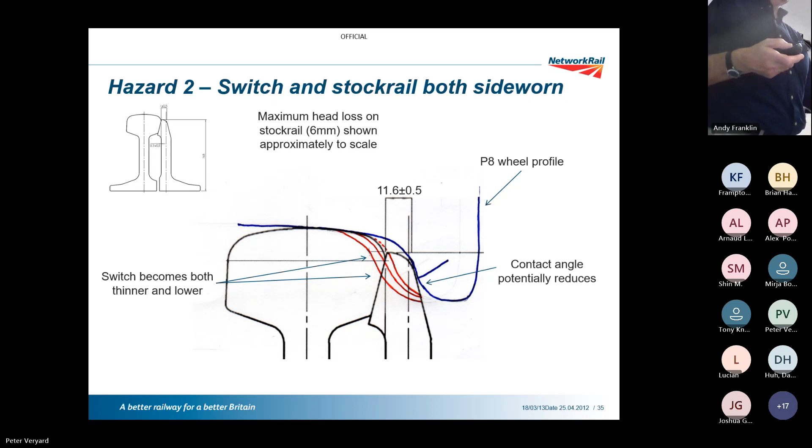Right, so that's hazard 2. So what does that look like? This is a pretty gruesome looking switch, isn't it? As you can see, we've got the side wear scar cutting into both the switch and the stock. What happened there is the wheel path approaching basically engages with this slope and then climbs up and over the top.

So for hazard 2, I guess the answer is you don't let the switches go anywhere near that far before you do it. We need to be more proactive in our maintenance of switches.

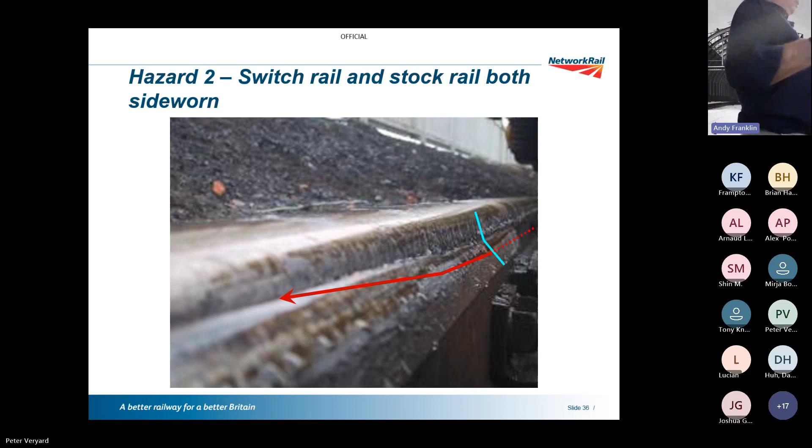Just out of interest, what's holding the slide down? Which one? What's wrong with it? The slide chair, what's holding it down? Nothing. I told you, these are all derailments.

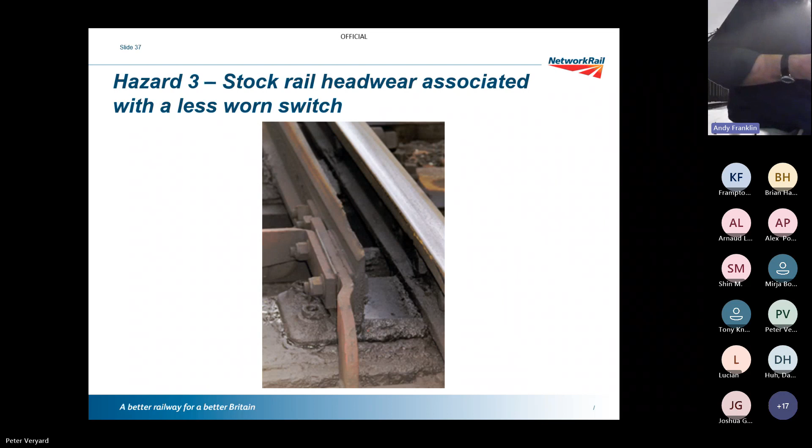Something horrible's happened to the lock stretcher as well, isn't it? But this is a really, really common one. So switch damage - as I said, the switch is designed to sit snugly against the stock rail in the chamfer. If you've got lipping starting to develop, particularly on the top of the switch or on the stock rail face into the chamfer, what happens is the switch and stock now come together at a point instead of coming snugly together, and under the load of a train you start breaking pieces off the switch.

I have seen an S&T team knocking them off with a hammer and chisel as well to get the facing point lock to work. But as you can see here, we've lost quite big pieces off the stock rail. We've lost a whole chunk of the switch. There's the switch toe down here somewhere, and we've lost a whole strip off the top, and we've got this really sharp edge there.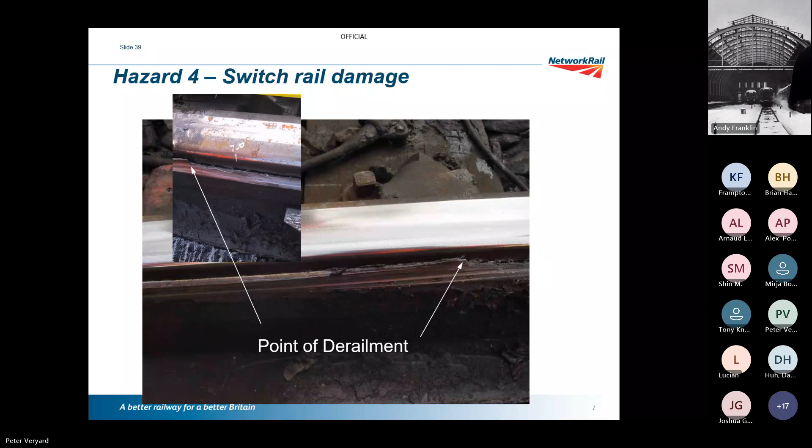And the final one is switchblade sharp corners. This used to be called the Pac-Man gauge. This is the new version, that's the old version. I couldn't find a picture of anyone using the new one.

But again, we don't want a sharp corner on the switch, do we? Because you run the risk of...

Actually, the edge cutting into a newly turned wheel and causing a derailment. One of the things we learned at Shrewsbury was about weld metal. You used to only apply this to austenitic manganese steel switches, of which there are still quite a few left. But also when you do welding, the weld material used to repair switches is much harder than the parent metal. So you need to do it after a weld repair, to make sure you've smoothed off that corner and haven't got a sharp edge.

Okay, so that's the 5 hazards. And we haven't had one of those recently, but you should never say things like that, should you?

So this is the table that appears in the standard, and I think this is really, really important. If you were involved in track inspection, I used to have a small version laminated and in my notebook, because you don't need gauges or anything to actually start looking at these things. But obviously, those are the things which are starting to increase the risk. I won't go through them in detail, but it's well worth, if you do inspections, just to have that with you.

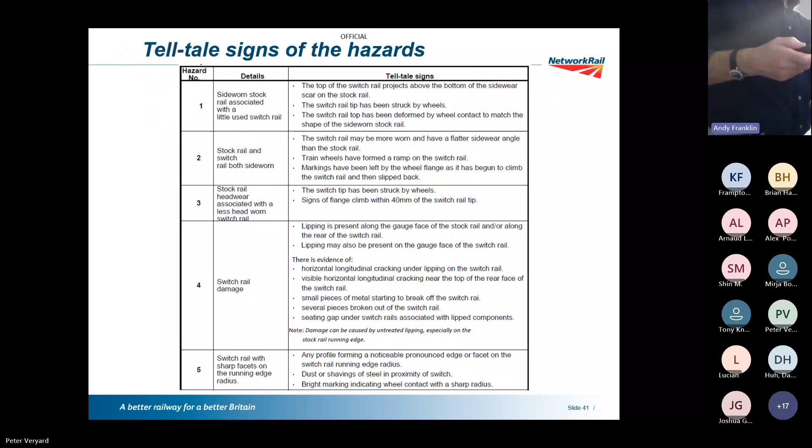Right, so the gauges help you quantify the risk, how bad it is. But your first step is to say, well, does this defect occur at all in the switch? If there's evidently no wear, then that's hazard eliminated. You can eliminate hazard 1 just by looking at it, can't you? There's no side wear scar, there's no risk of a hazard 1, is there? So things like that - I would get everyone just to remember that.

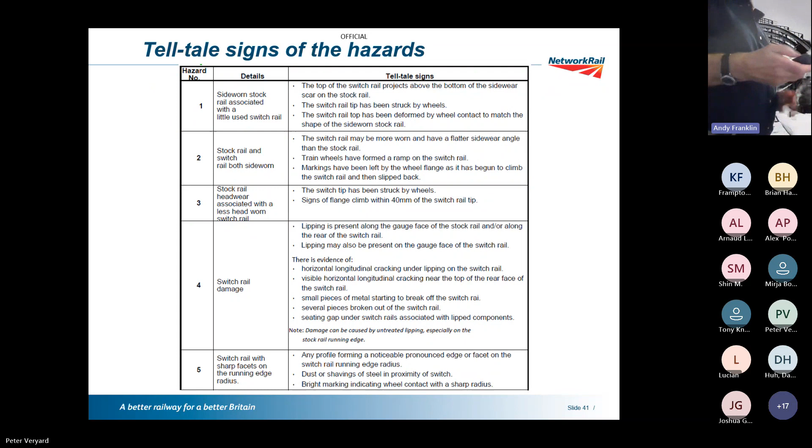And I certainly try to encourage my track patrollers to actually look at this sort of thing. So we've been a long while without a facing switch - that's dangerous talk, isn't it? Most recent one we had was in May '22 at Coatbridge, Sunnyside Junction. How can anything be called Sunnyside in South Glasgow?

But there we are, so here's the junction. It's fairly typical - a main-to-main crossover and then a turnout onto the branch, and it derailed on the facing points of the main-to-main crossover. It was really unusual because passenger trains don't normally use that route, but they were being used because another route was blocked by some major works in the tunnel. So the passenger trains don't normally go there, it's normally freight trains that use this.

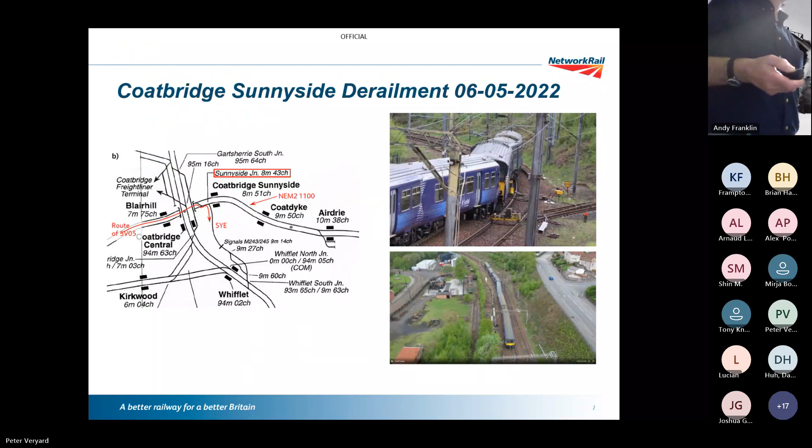So these are the switches - the point of derailment was in here. This is looking into the switch where the derailment happened.

So they cancelled - they got the new switch to site, and then they cancelled the job because they couldn't do a tandem lift because the headphones didn't work. So they didn't do the job, but at that stage I said, well, I've now got the track blocked all day, in daylight - a luxury these days. They could have done a really thorough inspection on the switches and just decided whether they needed to do any mitigation. And they didn't, basically, and a week later we had a derailment.

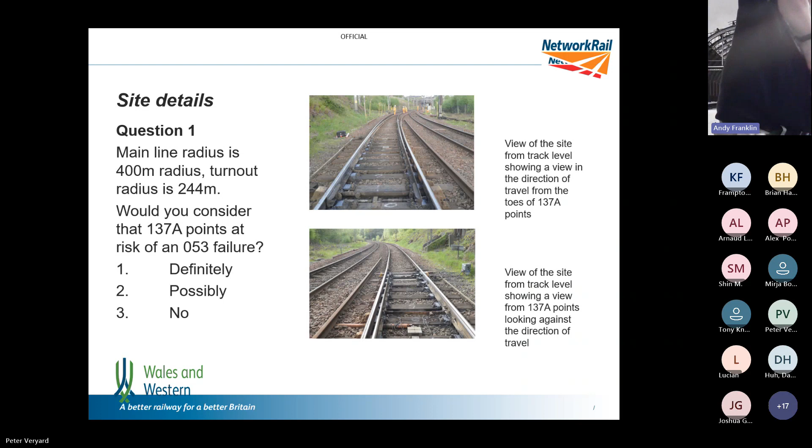I won't go through all that because time is getting on. So again, talking about what we were doing, what do we think the hazards are most likely on this set of switches?

One's definitely one, yeah, because the majority of the traffic is passenger trains on the through route. So yeah, you would certainly be at risk of one.

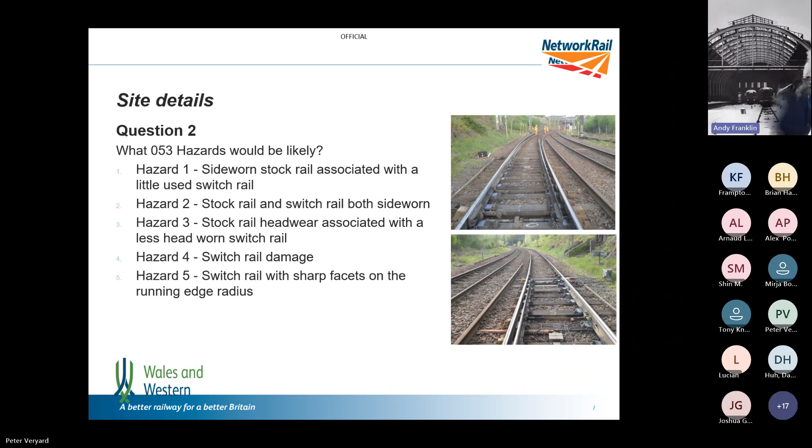In fact, what happened, and I'll get onto the diagrams, I'll skip through this bit of history. This is the actual switch. It's quite interesting that the switch doesn't look that bad, does it? It's not sitting up particularly well, and they had a lot of trouble finding the derailment marks.

It wasn't until we very carefully cleaned the switch off that these red spots were put on just to show where the derailment mark was. My belief is perhaps because we were monitoring this for side wear, that was all they were checking, and they hadn't kept an eye on the switch angle.

On that previous slide, Andy, what's going on with the switch tip? On the previous slide, what's going on at the switch tip there? Something right at it, there's a bit of damage there, yeah.

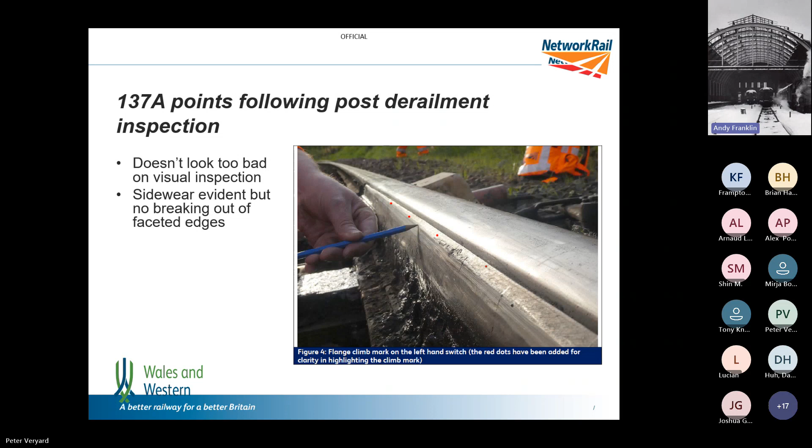But it says this was on weekly monitoring for side wear. The switch, I mean rightly, they picked up that the switch is reaching the end of its life and did that. But this is when you actually compare the reading.

And for whatever reason, they'd actually managed not to pick that up, since this profile is produced using the Mini-Prof program rather than the 053 gauge.

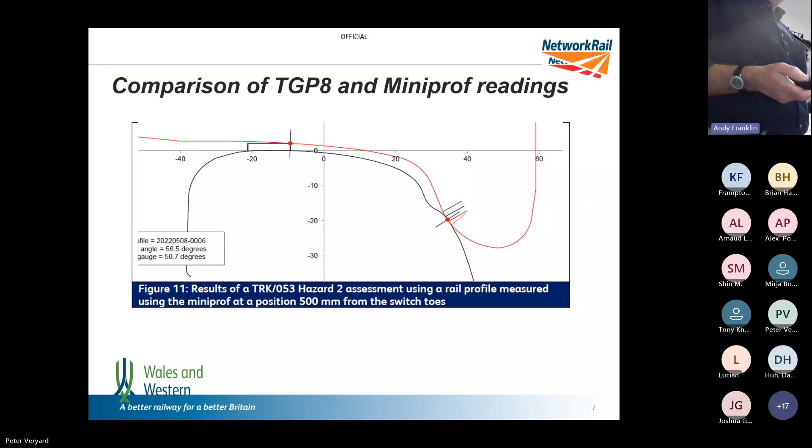Okay, so last little bit, still alright for time I assume. Yeah. So I think there's really a need, and we have done this, and I think we need to keep doing it, for upping our game on the maintenance.

I don't know how many of you are familiar with reliability centred maintenance, risk-based maintenance, as Network Rail decides to call it. But basically, and this is particularly applicable to things like track assets, where wear tends to be predictable.

So in the principle of that, if you choose a function of an asset of the track, that would be to support and guide trains.

So yeah, and this is time. If you've got some point where the failure is first observable, or loss of function, and you can identify the point it loses functionality for track, that would hopefully be a functional loss such as speed restriction, or banned facing moves or something like that.

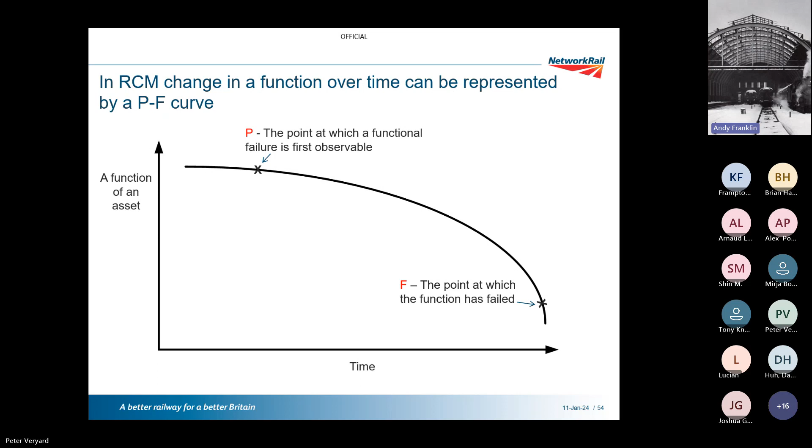You can actually estimate this time, and you can set your inspection frequencies to make sure that you pick up the fault in plenty of time.

So here's an example for a switch rail. The first signs you're going to see on the switch will be a build-up of lipping. That'll be the first thing you can pick up, and it's quite small. Can you do something about it when it's quite small?

Some places send the inspector out with a battery hand tool and they just remove some of this stuff, smooth it off. You can do that.

If you don't do anything, this is how the P-F curve was. If you don't do anything, the next thing is we start getting the switch held off the stock rail by the lipping. That possibly affects the points operation, hence they get in with a hammer and chisel and take it off for you.

If you still don't do anything, you're getting down to an intervention limit repair, so you've got to go and repair it in 7 days or something. And clearly that's really bad news for maintenance, because as soon as you start getting into reactive work like that, the first thing you lose is your planned work.

Then you might get into an immediate action limit, so that may require a speed restriction or blocked facing moves, and that's when it's failed. We've lost the functionality, the ability to support and guide trains, because we've now stopped the trains.

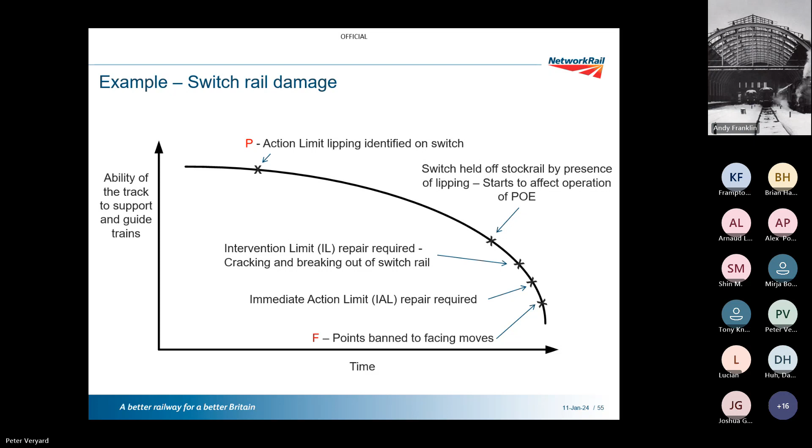I think the challenge is the tendency these days is we tend to operate down here, we've allowed the minimum level. The track standards are not a target, track standards are a minimum. The reason they're there is because it's saying effectively once you get here, you've really got to do something now, because here there be dragons.

But is there any reason why we can't intervene up here? An example has been rail management in Wales, where we've been doing this kind of approach for a long time. It takes time to do it, but we've got to the point now where we've shifted our defects in the work bank from up this corner, where there were lots of short-term defects, down to here, where the majority of the defects in the database are either 6 months or a year.

So it's much more flexibility to plan it. You're much further away from point F if you're operating up here. So even if it goes wrong, you've still got time to redo it before you get down there. We need to have, as maintainers, I think we need to really recognise that, as ever, the clever bit is getting from where we are now to the broad sunlit uplands here.

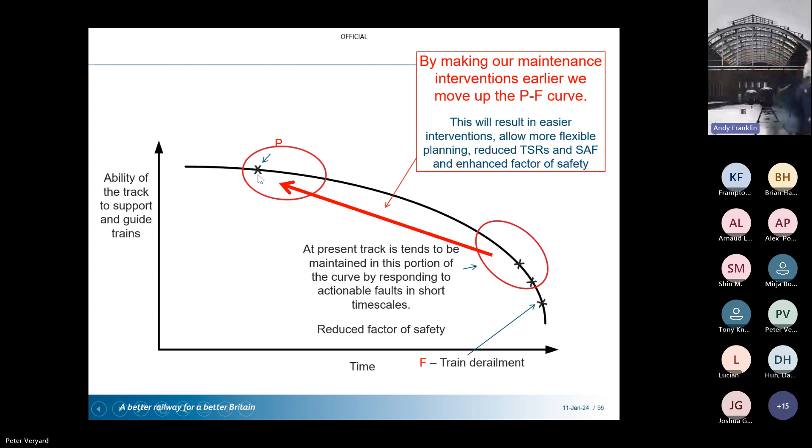So I think there's a good case for trying to up our game in maintenance. So to summarise...

The risk of flange climbing derailment can be controlled by managing the track geometry to minimise wheel unloading, and we've seen things like twist and top fault. We can manage track geometry to minimise the lateral force, so that's having good alignment, using the longest switches we can have, and things like that.

So the final message, I guess, is using the TGP8 gauge to visualise what's happened. Remember, right at the beginning, I said think of you're dealing with wheels, railway wheels, it's a big, heavy thing, wheels in bogies, and the effect that has. So use that to visualise what's happening when you see faults in the switch. Don't just blindly apply the gauges and hope for the best.

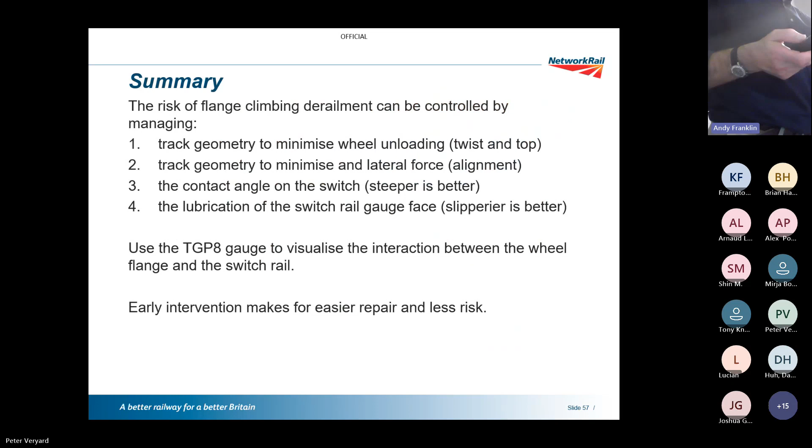And then early intervention just makes a lot of sense in my book, but there we are. That's it. Any questions?